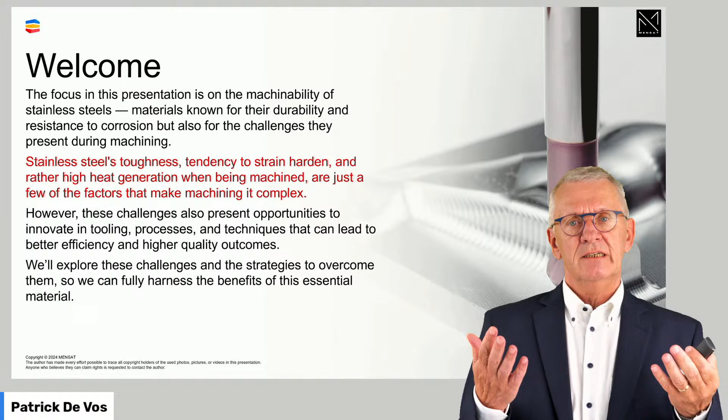And the project I'm talking about was about understanding this material better. And knowing what it means when we do machining, and with other words, knowing what we can expect from a cutting tool in such a material, and how we would select cutting conditions and so on.

And based on research then, in those days, we thought a major thing in stainless steel is the corrosion resistance. Because corrosion resistance leads to the formation of a very thin layer on the surface of a workpiece, a chromium oxide layer. And that gives the stainless steel that typical shiny view and resistance against oxidation and corrosion and stuff. And we thought that is the source of all our problems, because we thought we found something. Now, after all these years, we do realize that corrosion resistance is not really the big thing when we do stainless steel machining. So new insights.

What is new in this domain?

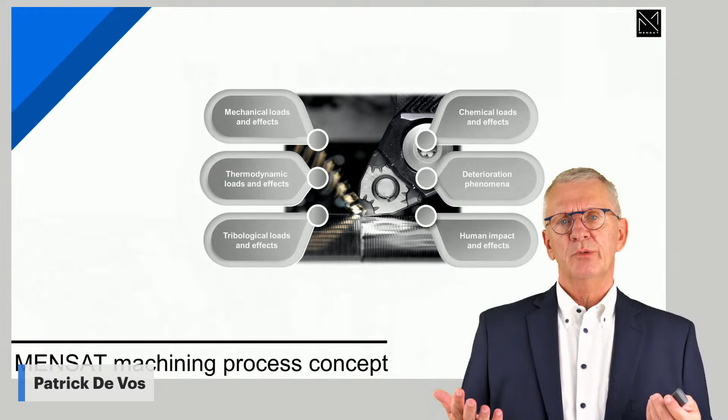And if I look to machining over the years, there is a model I have in my head I developed over time. Machining is a process, when it's steel machining at least, or let me say metal machining, where I deform material, I deform it so much it shears off, and the shorn off material is evacuated under the form of a chip. Now, this process, deformation, shearing off, involves quite a lot of things that are ongoing. You have mechanical effects and thermal effects, tribological effects are taking place, and all of that is influencing how the process is going.

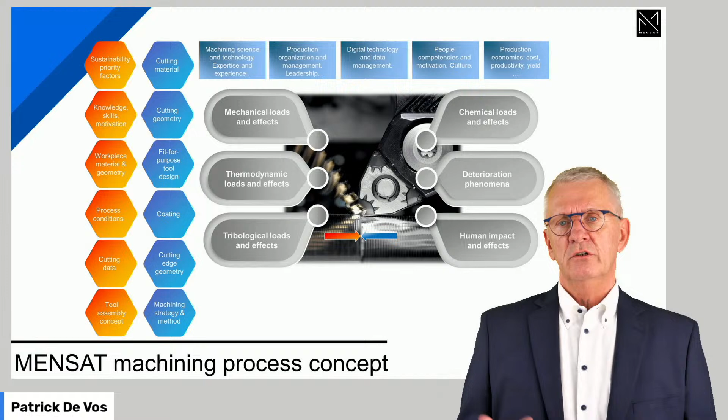Now, solving that equation demands quite a lot of how to say, knowledge, skills a machinist has to possess. He has to understand the physics of the process. He has to be aware of, I would say, economical considerations, costs and productivity and stuff like that. He needs to make sure he's using at all time the best technology available, not only cutting tool technology, but also, for instance, digital possibilities we have today to control this process. We have to embrace them, the attitude of people. So it's quite a lot of things we need to take into consideration.

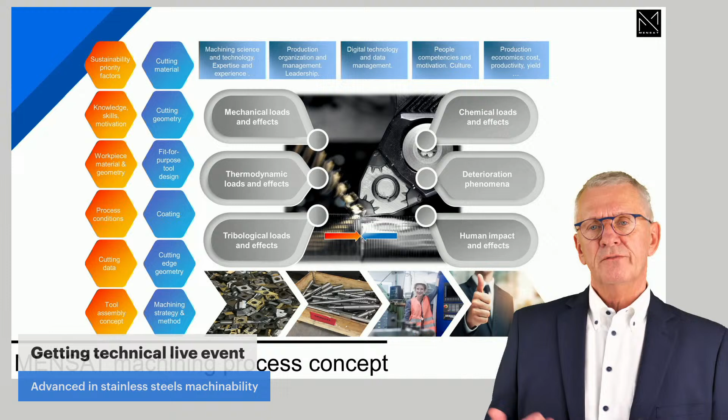And we need, of course, to measure. To measure is to know. We need metrics. And metrics in machining we find in cutting tool evaluation. Used cutting tools tell us so much. We learn from workpiece evaluation. The quality, is it in line with expectations? We learn it from asking the operators.

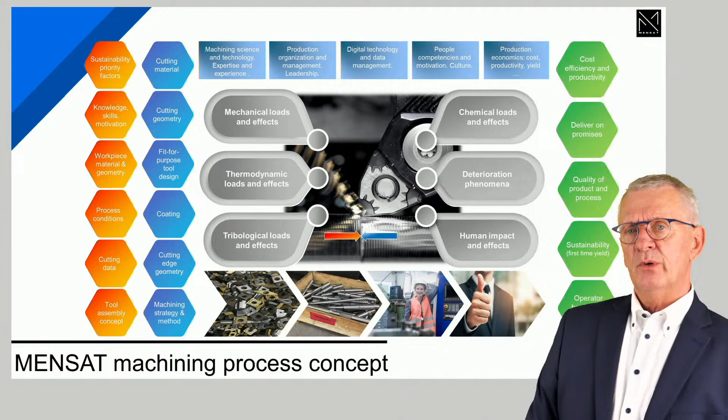Those people are standing all the time very close to the process, and they have their observations based on their experience, what they expect and didn't expect, and stuff like that. And of course, ask customers, ask the people for whom you are producing the parts, if the part you deliver is in line with expectations.

Both price expectations, delivery expectations, quality expectations, all of those things, because that's the result. The result of a machining process is more than just a correctly finished workpiece. It's a correctly finished workpiece in a certain economical situation. If you want to read about these things, there's quite a lot of literature available from Seco on these subjects, which you can ask for at any time.

But very important to realize is that I'm not alone here. I'm together with my two, I can say friends in the meantime, Alasia and Margarita. They are helping to make this happen from a digital technical perspective. I have the fun part, I can do the presentation.

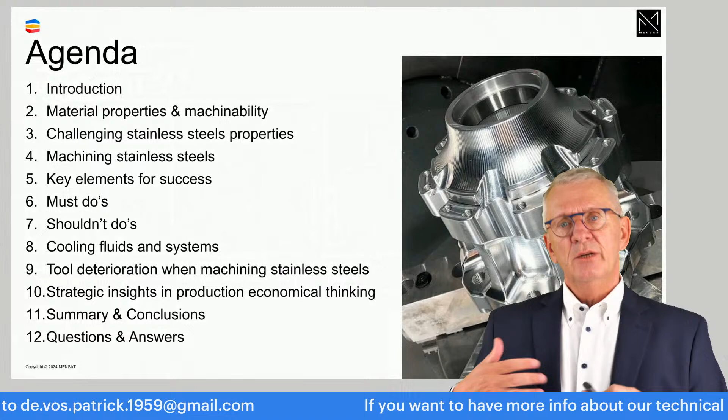What I want to talk about is, in the first part, stainless steel. So what is it, what are the latest developments, what are the challenges, what are the properties when we have to machine these materials. The second part is more a lineup of advice. If you have to machine stainless steels, think on this, do this, don't do that type of stuff. A collection, one could say. The first part is more the academic side, while the second part is more the practical part, the experience from real life I brought together.

Now, stainless steels, first the definition. A stainless steel is a steel alloy. Main alloying element is chromium, and when in a steel chromium alloy there is at least 10.5%, there are different opinions and definitions depending on certain standards and norms here, but at least 10.5% chromium should be present in the structure.

Then we talk about a material with a certain resistance against corrosion, staining, rusting, and that is what we call a stainless steel. Of course, we add all kinds of other alloying elements to this structure to give the material, next to corrosion resistance, other wanted properties more in the mechanical domain, like hardness and that type of stuff. Stainless steel, once being rather unique as a material 30, 40 years ago, today as a construction material is widely used in the industry.

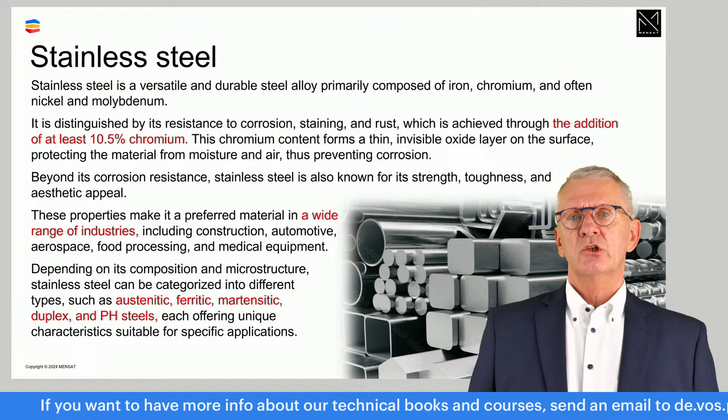You find it in all kinds of applications. And if you look to stainless steel, because stainless steel is a family name, a very big difference between different types of stainless steels is the structure of the material. And that's why we group stainless steels into, I would say, 5 different groups. You have austenitic stainless steels, ferritic stainless steels, martensitic stainless steels, duplex stainless steels, and the so-called PH steels, precipitation hardening steels.

Each of these subfamilies has its own specific properties, and if we have to machine the material, we will see differences. So you have ferritic, martensitic, austenitic, and duplex. I keep PH steels a bit on the side for the moment. All of these material groups are connected to each other because one structure goes into another structure, and we should avoid becoming too metallurgical because otherwise we are going to get lost in time.

It's all depending on which alloying elements you are adding or extracting from a structure, and by doing so you create different types of material properties. Now, most of the time, we use the AISI system here. People talk about the stainless steel from the 400 group or the 200 or the 300 group, that relates to the structure. Very typical, I think the basis of stainless steels, if I look around me today, if I look around in workshops, the most seen structure is austenitic stainless steel.

Austenitic stainless steel, it's the 300 series when you talk about designations. It's stainless steel in which there is chromium as an alloying element and nickel. Nickel is added to chromium stainless steel to strengthen the structure. And that combination, steel, which is iron and carbon, chromium and nickel, that's the chromium nickel steel, the 300 series, austenitic stainless steel.

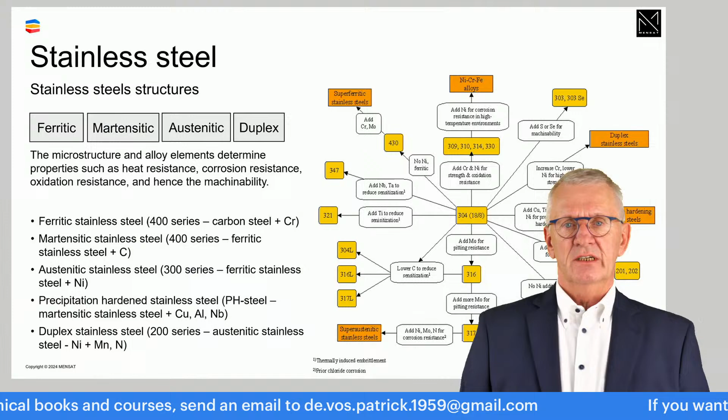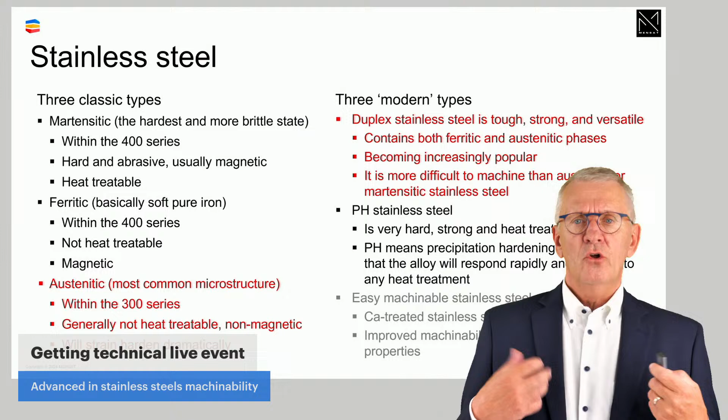So there are three classic types, one could say. You have martensitic, ferritic, and austenitic stainless steels. It refers to the structure. An interesting practical thing to remember, if you are confronted with a stainless steel and you say, I don't know what it really is, a big difference between austenitic and the others is that austenitic is non-magnetic. So you can take a magnet. If the material you have to machine is non-magnetic, most probably you have austenitic stainless steel.

Next to these three basic types, you have the duplex stainless steels. Duplex stainless steels, as the name says, it's a combination of structures. It's a development that a couple of years ago went very fast. All kinds of duplex stainless steels were developed.

For us machining people, duplex stainless steels give a kind of challenge because it's not always obvious what to focus on. Which structure is it, the austenite or the ferrite in the structure, that we have to focus on? That's a bit of a selection challenge we have when we machine duplex stainless steels.

Then you have the PH stainless steels, precipitation hardening stainless steels. It's a Swedish development, from the Swedish metal or iron industry, which came first with this type of material. PH stands for precipitation hardening. It's a material developed to react rather fast to thermal treatments. I'm going to say something not entirely correct, but it's kind of a self-hardening material. If you add heat to it, it starts becoming stronger, harder. Now that sounds very good, but for us machining people that's a big challenge, because what do we do in machining? To a big extent, we add heat to the workpiece material. So we could end up in unwanted situations with this type of material.

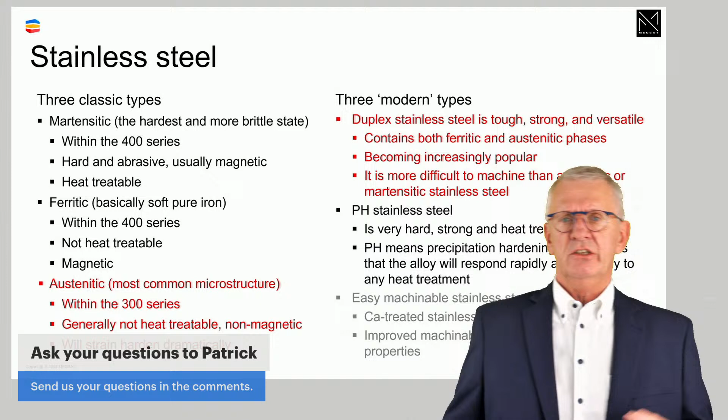With traditional stainless steel, the cutting speeds are rather low. I don't say low, I say rather low, everything is relative. And people feel that as a limitation when they talk about productivity. Taking that limitation away was the aim with the calcium-treated stainless steels, where suddenly you had a lot more opportunities to work with bigger cutting speeds. Of course, that comes at a cost. The cost is, in general, if you compare a stainless steel to a calcium-treated stainless steel, the calcium-treated one, from a material purchasing perspective, is more expensive. On the other hand, it could be a well-done investment if you look afterwards at the productivity you can gain in your machining applications.

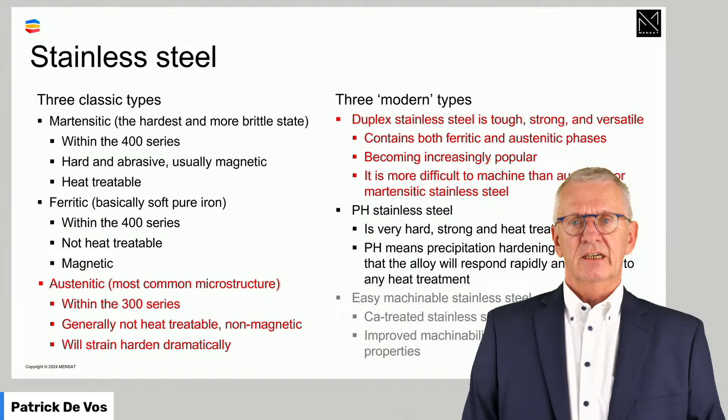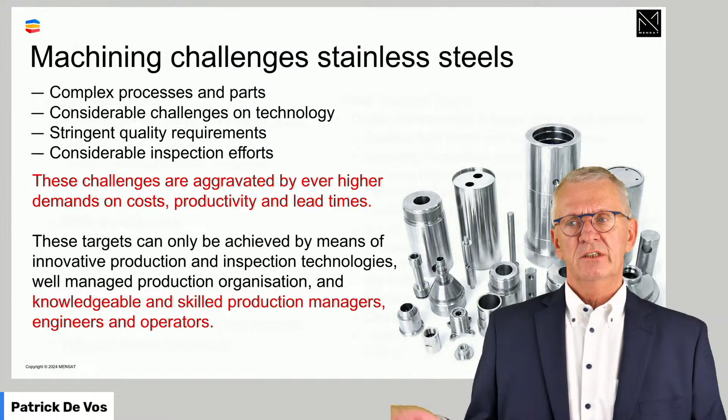Stainless steels are more and more the normal materials. What we see is that very often the applications, the parts, are rather complex. Technology is sometimes a challenge. Quality is always looming around the corner, because these are typical workpieces where quality demands are higher. When quality demands are higher, you have higher efforts for inspecting workpieces, finished workpieces. So that is what the machinist is confronted with in general, in this type of application or workpiece material.

Now, machinability, workpiece material properties, machinability. I guess you are all familiar with the so-called ISO system, where we group materials into 6 different groups. From there, you define where the material you have to machine belongs, and for a certain material group you receive advice concerning tool selection, cutting material, geometry, cutting conditions, and so on. Stainless steels is one of these groups, the so-called M group. That's why a lot of people refer to stainless steels as the ISO M materials. It's one of those sayings in the machining world.

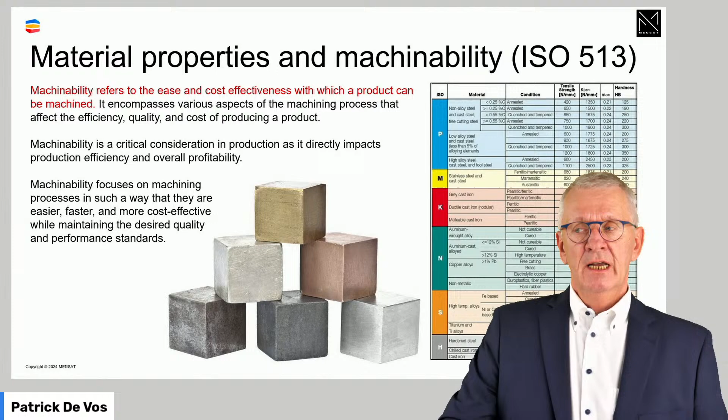If you look at the traditional ISO system, it mainly focuses on mechanical properties to classify materials. For a long time, when we looked at stainless steels, we saw the mechanical properties, we saw the results from machining, we saw wear patterns, we saw tool life, and it was a bit of, we did not really understand, because tool life was lower than expected.

Tool wear was more severe than what we expected based purely on mechanical properties. That's why 10, 15 years ago there was a big project, again in Sweden, where the steel industry and tooling people worked together to try to figure out if it's enough to base machinability ratings on mechanical properties only. The result of that big project, led by Professor Ståhl from Lund University, was that next to the typical mechanical stuff like hardness, abrasiveness and ductility, there are other things that influence how a material property will affect a machining process.

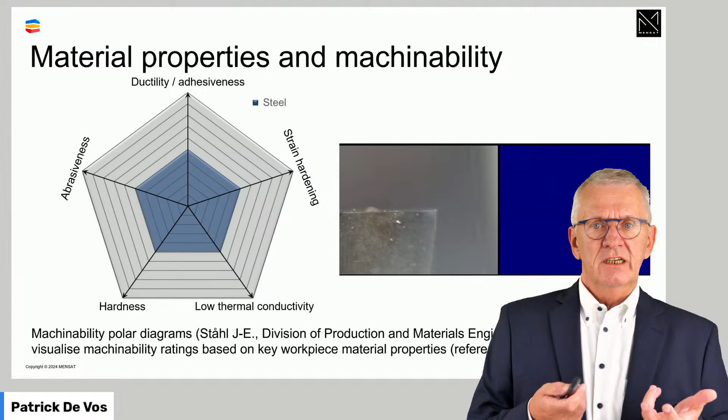The two main ones are strain hardening effects, some materials become harder when you deform them, and machining is a deformation process, and thermal conductivity, during machining heat is generated, and it matters to what extent it's possible to evacuate that heat away out of the cutting zone, yes or no. That means, and that's what I try to illustrate with the videos you just saw, that a machining process has a mechanical side to it.

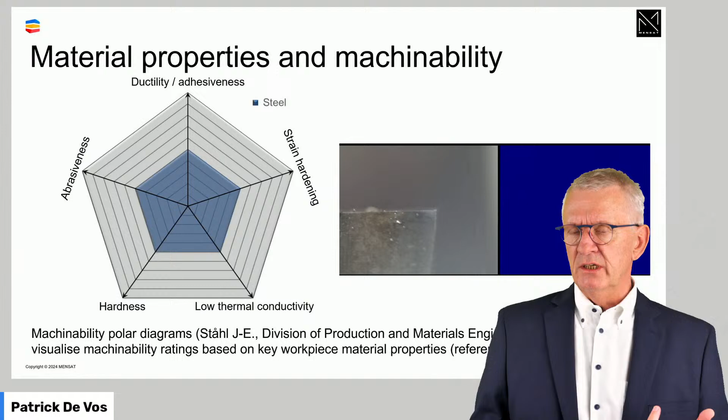In this diagram you see the 5 axes, which is a visualization from the model developed. The left side is the mechanical side: ductility, abrasiveness, hardness, typical mechanical properties. The right side is more the thermodynamic side: strain hardening effects, low thermal conductivity, ductility, adhesiveness. The vertical axis is a bit on both sides.

So if we want to understand how a material behaves during machining, there are 5 properties we need to take into consideration. The interesting thing on this model is that the old saying that flank and crater wear is the only acceptable wear during a machining process is very correct if you machine steel, but it does not really work if you have to machine another material. We can improve that by saying to which extent one of these 5 properties is present in the material, you will see a certain typical wear pattern on a cutting edge.

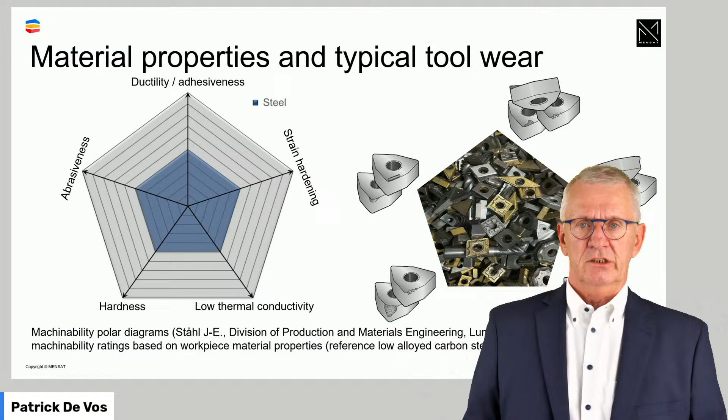That means that if you are confronted with a material and want to figure out how you should do machining, which tool, which carbide grade or cutting material in general, which geometry, feeds and speeds, you make certain selections and observe the process and look at used cutting edges. You can much more precisely say, okay, what I see is what I expected or not. And if not, I have to redo the exercise. I think that's perhaps the most beautiful thing on this system. It makes wear control, deterioration control, much more easy or predictable.

Now, if I look to stainless steels, they have a certain structure, they have alloying elements, there are mechanical properties, and so on and so forth. It's the ISO M group.

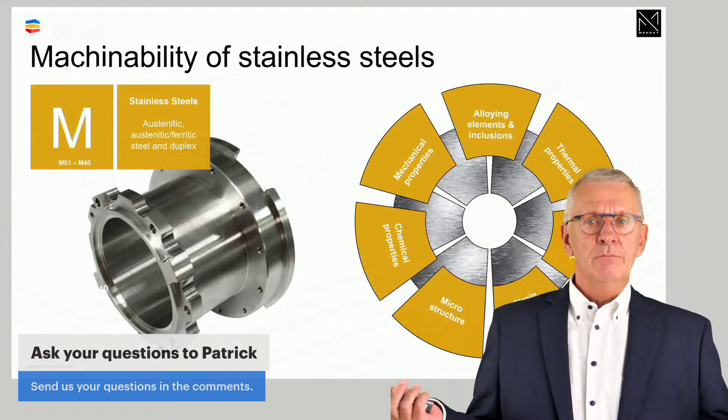That means we have to be careful with the heat which is generated, because if more heat is generated, it's not that easy to evacuate it away from the cutting zone as it is in traditional steel, meaning that the cutting temperature will go up higher than what we are used to. And that has consequences for tool selection and for cutting condition selection.

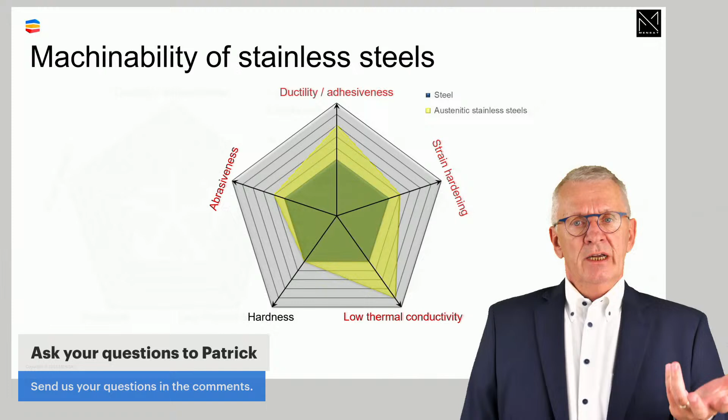If we look at austenitic stainless steel, and I put this one in the middle because it's the one we find mostly in the industry, in the workshops today, here we see, with the exception of hardness, that compared to traditional steel, everything is more present. It shows higher abrasiveness, higher ductility, higher adhesiveness, higher strain hardening, and seriously lower thermal conductivity compared to steel.

So machining austenitic stainless steel demands for, and that was the challenge back with the project we had a long time ago, tools specifically designed for a different type of environment. It demands for cutting conditions which are selected in line with what the cutting edges will be submitted to.

To make the picture complete, PH stainless steels, precipitation hardening stainless steels, you have to worry mainly there about abrasiveness. Ductility will be a lower of a thing. Chip control will be easier than normal, but abrasiveness is the thing to worry about in PH stainless steels.

Duplex stainless steels, as I said, if you compare them with steel roughly, everything is more severe there. But the thing with duplex stainless steels is that we don't know exactly, workpiece by workpiece, which property will be the prevailing one during the actual operation. For sure, low thermal conductivity is also a major thing there.

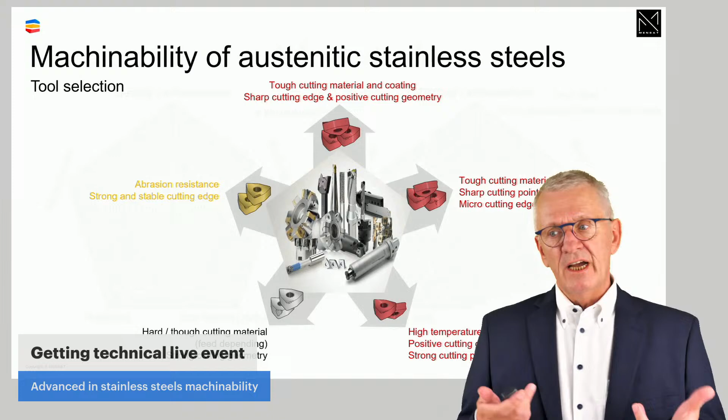So, I use the example here of austenitic stainless steel. If you are confronted with an austenitic stainless steel, how do you select tools? Focus on the red parts here. Those are the demands we have for cutting tools if you want to take into consideration the typical properties of stainless steel. The red ones are the important, critical ones. The orange means be aware of, and black means there is no difference with steel machining. The same applies with cutting conditions.

Focus on the red parts, because compared to traditional classic experience in steel machining, we will see differences there. Keep your eyes on used tools. Used tools will tell you how well you made your selections.

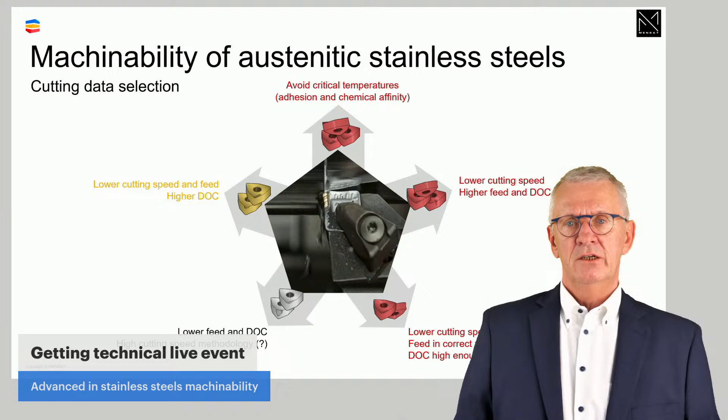Something I'd like to add here: we always talk about what would be a good tool, a good machine, a good geometry. But what would be a good operator? What is a good machinist? A good machinist is somebody with knowledge, insight, and who knows what's going on.

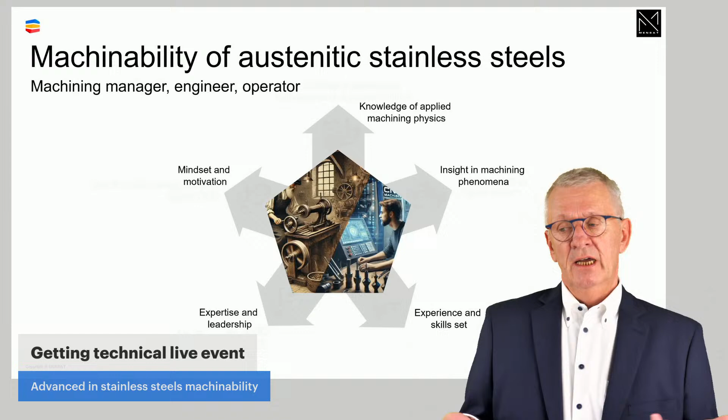If you stand next to a machine where you see stainless steel being machined, you see things. And based on what you see, it tells you a story.

Machining of stainless steels, tool wear will be faster than what you are used to. That means machining costs will be higher than in traditional steel machining. Tool changes will be more frequent due to shorter tool lives, and that means your machines will stand still more, relatively speaking, than in steel machining, lowering your productivity.

On the other hand, if you look to workpiece quality, you are going to be confronted with some things that will demand post-machining processes like deburring, and that will also lower your productivity.

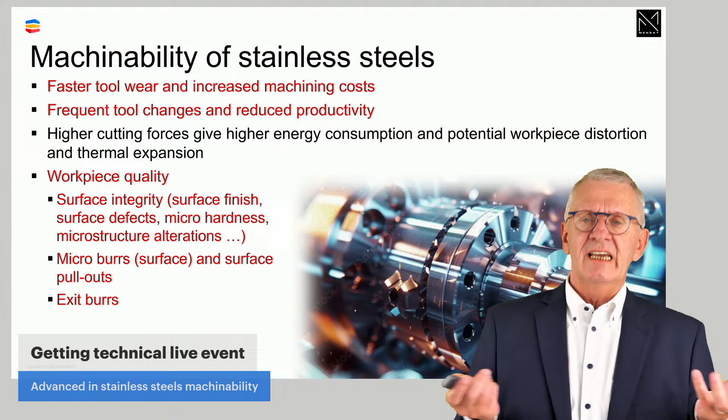I draw your attention to this, and later on I want to line up some things. Production economy, having an eye for costs and times, when you do stainless steel machining, should be on a higher level. It's dangerous to make statements like that, but I hope you understand what I mean - it's a more important thing than in traditional steel machining. Not saying that in steel machining it's not important - don't put words in my mouth that I didn't say.

Stainless steel machining - insights and practical experience, bringing it together, that's what we want to do.

We are confronted with a material with higher toughness. Higher toughness means higher cutting forces, and it means increased, faster tool wear. Those are the things we have to worry about.

Strain hardening tendency is always present to some extent in austenitic stainless steels, for instance, very much. It leads to very specific tool wear patterns, and it leads to surface roughness considerations that are important. Tool life could be limited due to that.

Lower thermal conductivity is perhaps the most important thing. It means heat generated during the process is not evacuated, stays in the cutting zone, and we will have to balance that by tool selection, cutting condition selection, and machining strategy selection.

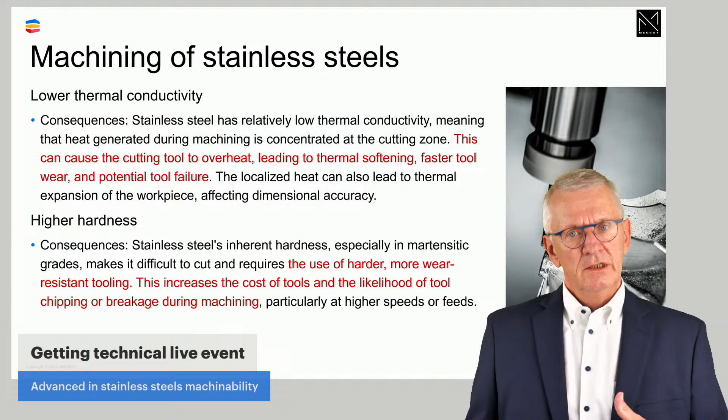Higher hardnesses for some - think of martensitic stainless steel - for austenitic stainless steel it's less a thing. What I'm trying to give you here is an overview of properties you should be aware of, so you can make sure your selection process is in line with this.

Adhesion tendency, the formation of built-up edges - austenitic stainless steel has a higher adhesion tendency and a tendency to gall. I'd like to make a difference between the two, because adhesion is a part of the workpiece material connecting to the cutting tool. It's a rather soft connection, easily broken off, and it could lead to chipping of the cutting edge - that's the traditional built-up edge stuff.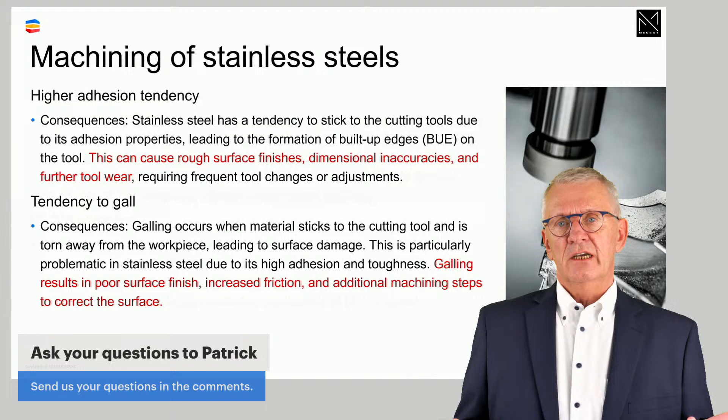Tendency to gall means that in some cases the material that connects to the cutting edge connects so much that it breaks away a part of the machined surface on the workpiece. It seems the same phenomenon, but gives other types of issues, because it deteriorates the quality of the machined surface of the finished workpiece, and we have to be aware of that.

Corrosion resistance - just for sentimental reasons I bring that anti-corrosion layer up again. People say, if you know the PRE factor, which we use for defining the quality of a stainless steel, the higher the PRE, the higher the corrosion resistance, one could say. But if you have high PRE, it means you have a strongly formed anti-corrosion chromium oxide layer, and if we have to machine through that, it has consequences.

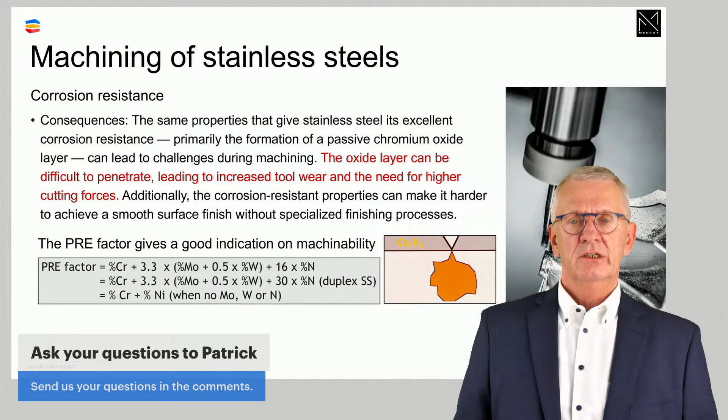40 years ago, we thought that was it. Today, we know better. We know that this plays a role, but much more important is the formation of a strain-hardened layer on the machined surface that influences how the process goes.

Adhesive wear and galling wear, the picture is different. That will happen at certain critical temperatures, and if your temperature is lower or higher, then it will disappear again. That means that in stainless steels, we talk about a low productivity domain and a high productivity domain. Low means that you keep your temperature lower than a certain critical value to make sure adhesive wear does not take too much out of the cutting. High productivity means you are able to take your cutting speed high enough to pass the dangerous zone, and again have temperatures which are not favorable for build-up edges to be formed.

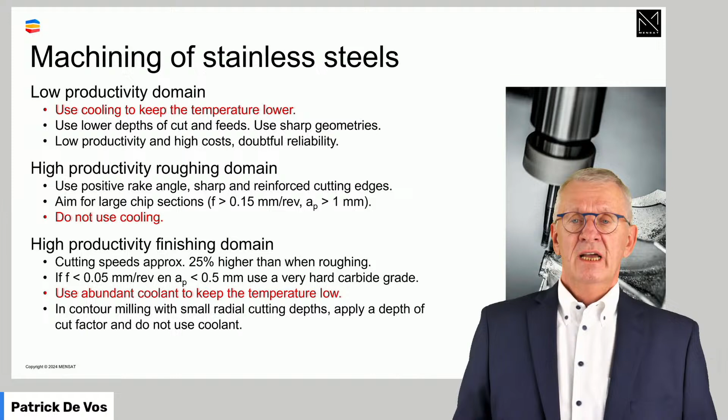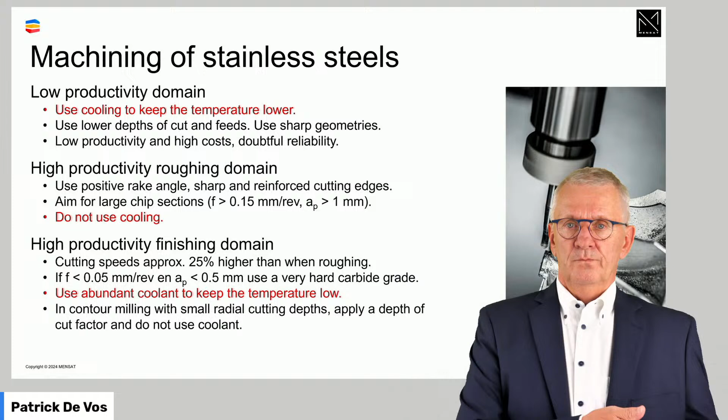It's a selection you make, depending on the equipment you have, depending on the workpiece you have. Can you go for higher cutting speeds, meaning productivity? Yes, good, do it. Can't you? Go low. It's something to bear in mind.

General guidelines: if you machine stainless steels, stable tooling, sharp geometries, large depths of cut and feed. It's all based on experience. Change cutting edges regularly - remember you will use more cutting edges, tool life will be shorter. Think on it that stainless steels have hard surface layers, chromium oxide, strain-hardened layers. Think on heat development - it's limited, because you could end up in critical temperature situations.

Chip thickness is very important - the thickness of the chip, because the thicker the chip, the more it has the capacity to evacuate heat out of the cutting zone. Thin chips don't have that. That would make the problem with too high temperatures in the cutting zone even worse.

Use big tools, have a big mass to evacuate heat. If you reduce your cutting depths, then you should increase your cutting speeds. Remember, it's not about low temperatures, it's not about high temperatures, it's about avoiding some critical temperatures.

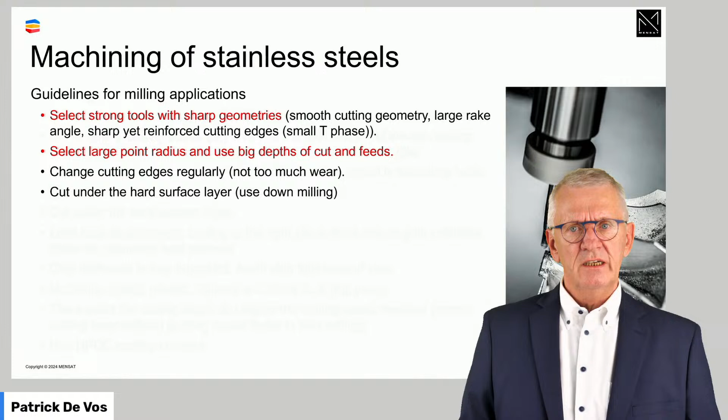Specifically in milling, like in general turning, drilling, whatever - strong tools, sharp geometries, large point radiuses, especially for end mills, I'm thinking. Big depths of cut and feeds, change the milling cutters or cutting edges in due time, cut under the hard layers, do down milling if possible, limit the heat development, use cooling, use it correctly.

Average chip thickness - chip thickness is in general important. The so-called average chip thickness in milling is even more important. Avoid feeds of 0, because then you have strain hardening extremely taking place.

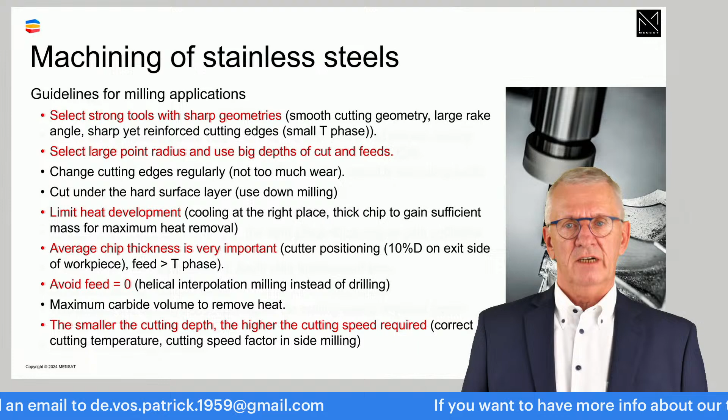Maximum volumes, carbide volumes to evacuate the heat. And also here, small depths of cut means high cutting speeds. The so-called speed factor in milling applications is a very important thing when you machine stainless steels.

Conclusion: you will need more cutting edges than at first sight, perhaps what you thought when you compare to steel machining. Be careful with things making life even more difficult - interrupted cuts, casting scales, casted stainless steels - and be careful with false economy, because after a roughing operation, there comes a finishing operation.

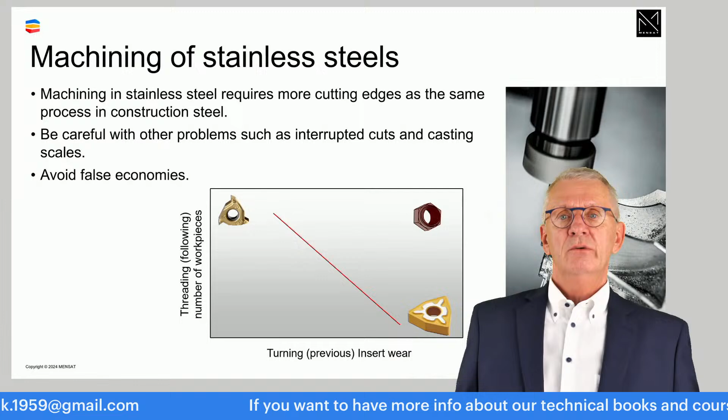What you see here, I try to visualize a turning application followed by a threading application. If you use your cutting edges too long in the turning application to save money, you could create strain hardening layers on the surface where later on a threading tool, which we use with small feeds and depths of cut, it's impossible to cut through. And then you are going to save on turning inserts, and you are going to spend a hell of a lot of money on threading inserts, which are more expensive. I mean, keep your economy right.

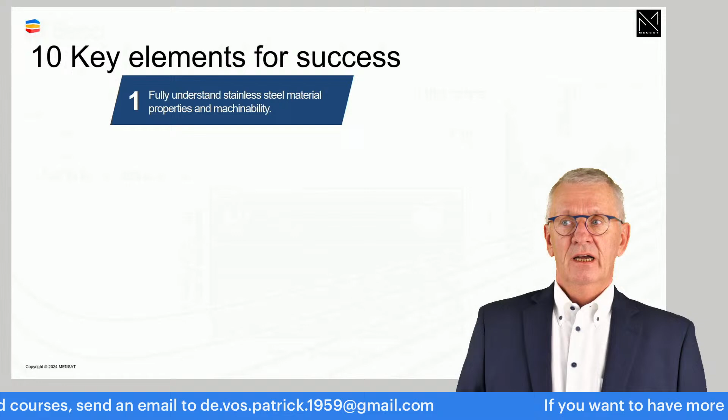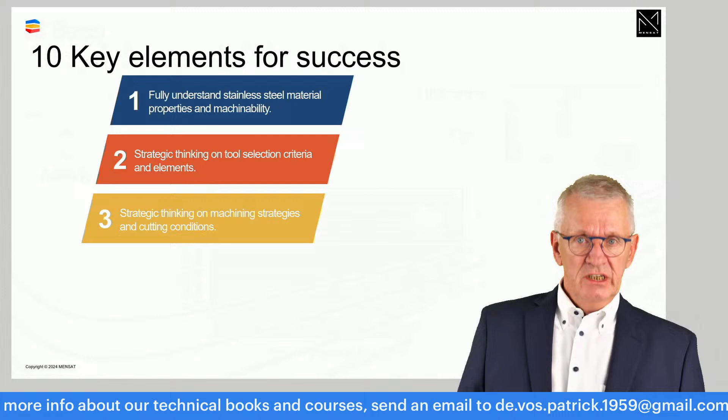Make sure you do the correct steps here. Fully understand stainless steel - tip 1, and how it relates to machinability. Strategic thinking on tool selection. Machining strategies and cutting conditions. And more important is geometry than cutting material.

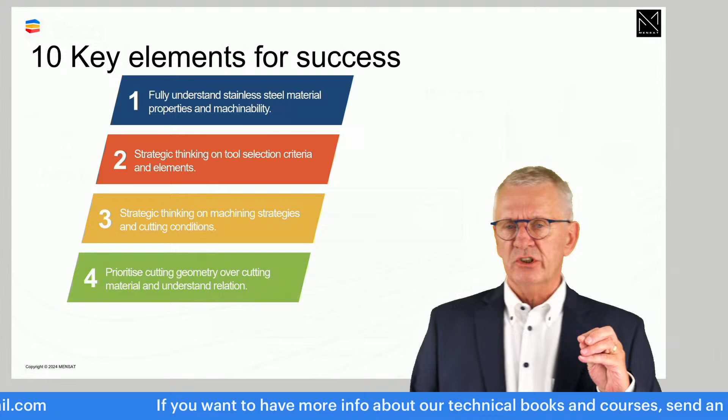Again, I don't say cutting material is not important. Cooling is an important thing here. Wear monitoring - your tools will wear out faster, so especially when it's new, make sure you follow up. Clamping. Stainless steel is a typical material where we will have micro vibrations. Clamping and fixturing of workpieces and tools is important.

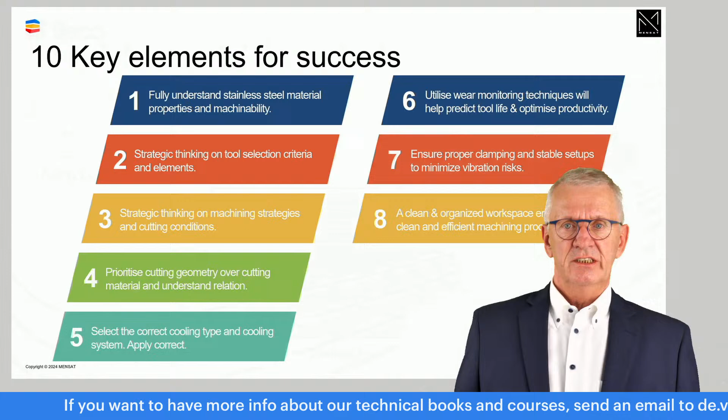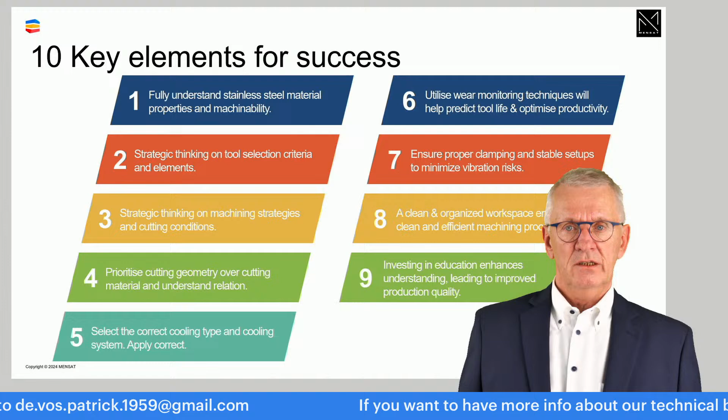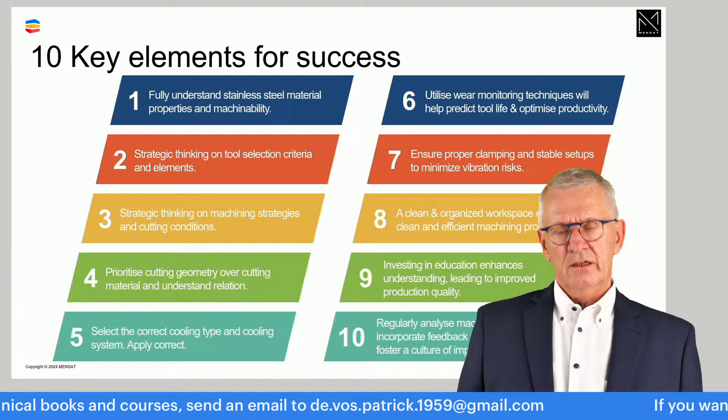Make sure the work environment is as neat as possible. That's a bit beyond the actual cutting. Make sure people have the needed education and knowledge to understand the material they are machining, so they can react in the appropriate way when they are facing something, and make sure to analyze regularly machining, and what you learn from the analysis, document it, keep track of it. It's very valuable information for you.

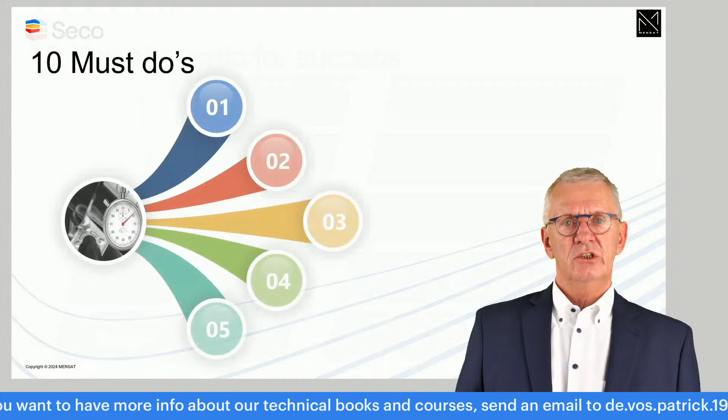Things you should always do if you machine stainless steels: the correct tool. As I said, the big problem in the past was we didn't have correct tools for stainless steel, which led to a lot of problems. Today we have the correct tools, make sure you use them. Sharp cutting edges is a major thing.

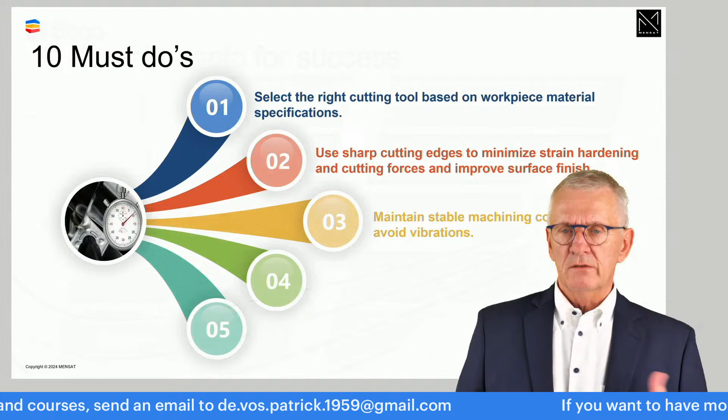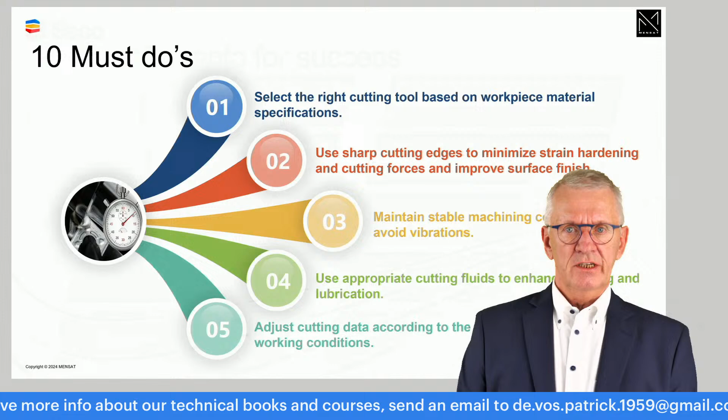Stable machining, you will be confronted with micro vibrations, so be aware of that. Cutting fluids, cooling systems are important here. And cutting data must be in line with the material you have to machine.

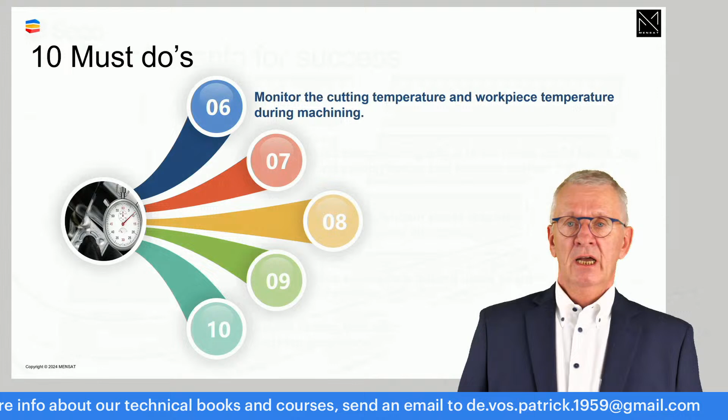It all seems normal, but trust me, I see so often when I'm in a workshop that these basic things are not always respected. Cutting temperatures is the thing you have to worry about. Make sure your equipment, being the machine tools but also your cutting tools, are in the best possible condition. Chip removal is important, because you will have more difficulty evacuating chips, so it deserves some more attention.

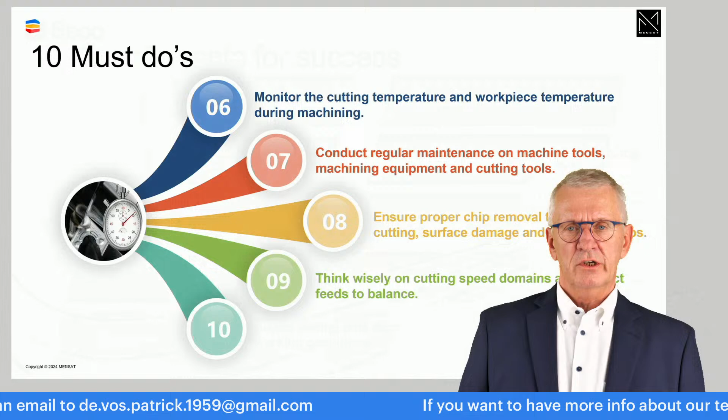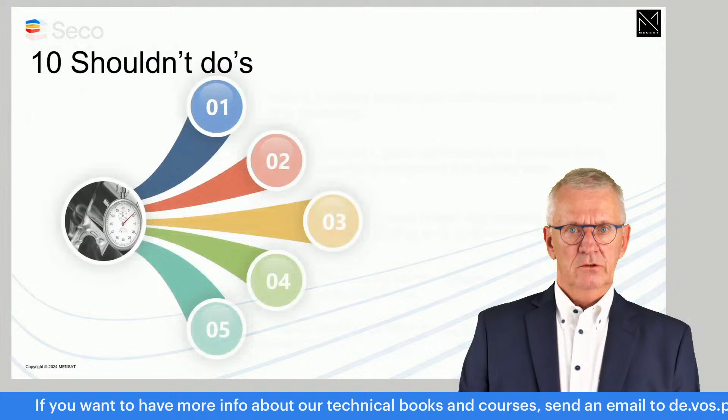Cutting speed domains, remember it's not as high as possible or as low as possible. There is somewhere a domain you have to be careful with, depending on temperatures. And again, keep track of your observations and make sure it's available for everybody who needs it.

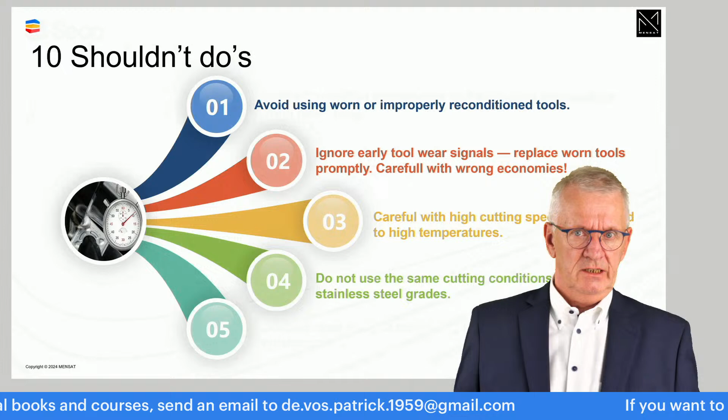Too much worn tools should be avoided. Keep your eyes on the tool and make sure you can read the signals correctly. High cutting speeds, okay, but think about how cutting speed leads to more heat generation, and heat generation potentially will increase your temperatures, and that could be an issue.

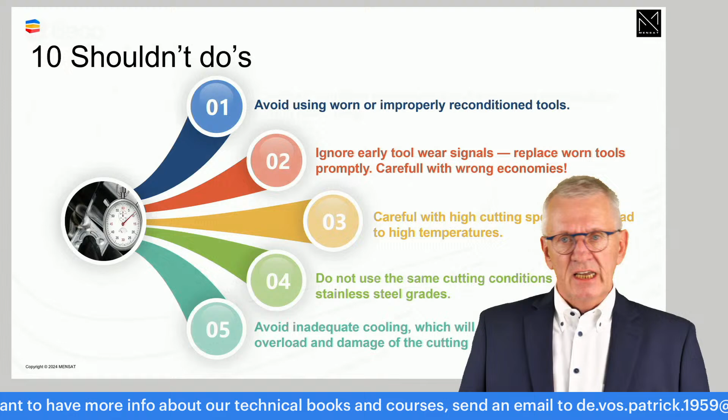Cutting conditions should be different depending on the type of stainless steel. There is not one cutting condition for stainless steel, all of them. It's a lot of different types of materials. Cooling, I already mentioned how important it is.

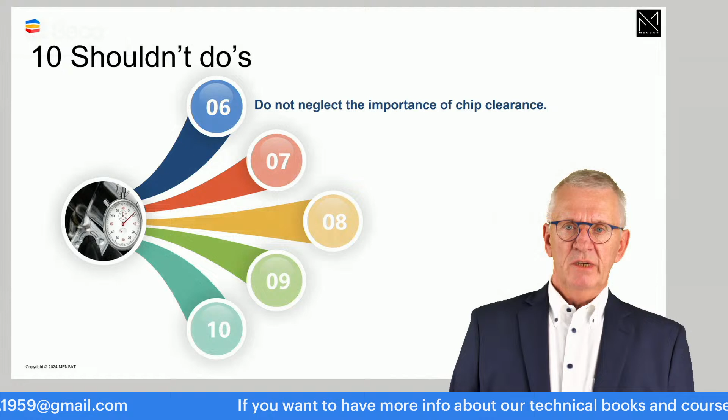Chip clearance, make sure the chips go away from the cutting zone, especially in milling applications, I would say it's an important thing. Cooling should be adapted to the application.

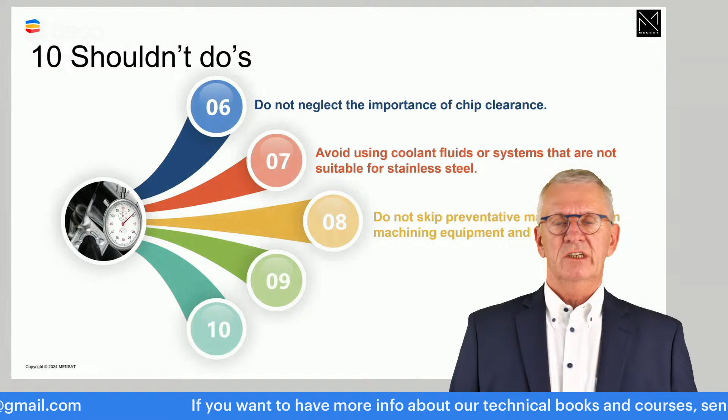Preventative maintenance should be at all times. It's a bit in line with what you should do. So what you should not do is here.

Rigidity, lack of rigidity is a dangerous thing. And again, untrained, uninformed operators and engineers is not a good thing.

A few words on cooling. Cooling systems I want to focus on. Flood cooling can work in stainless steels in most applications.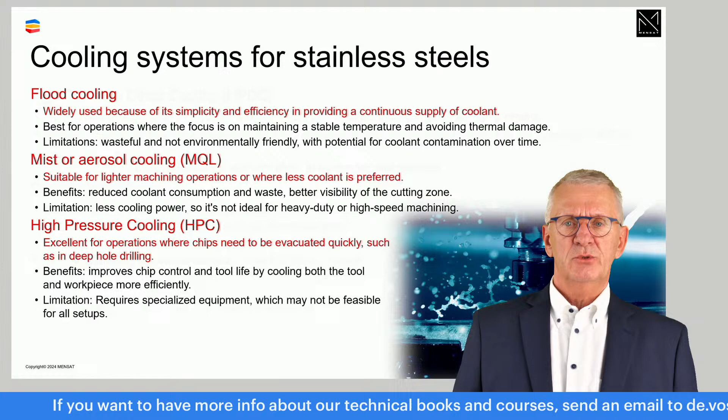Mist or aerosol cooling, the so-called MQL cooling, be careful. In certain circumstances it can work. High pressure cooling can work, especially where chip evacuation is a major issue.

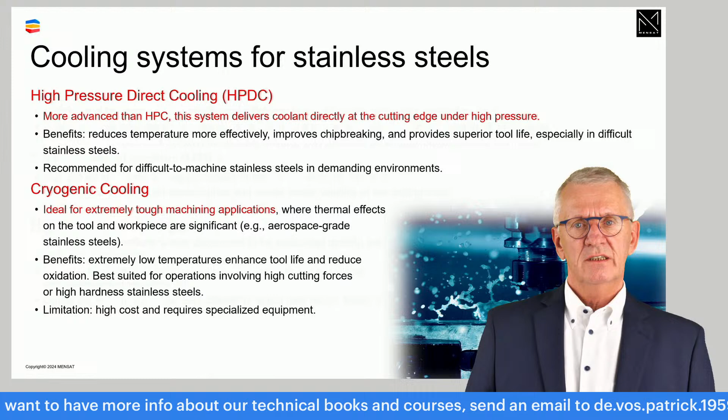But coming to the two interesting ones, perhaps for stainless steel, or more interesting than the traditional ones, is the so-called HPDC type of cooling, high pressure direct cooling. If you compare that with other cooling systems, this really gives very noticeable improved situations. And cryogenic cooling, perhaps that's a little bit too much still in an academic environment, but it gives promising results.

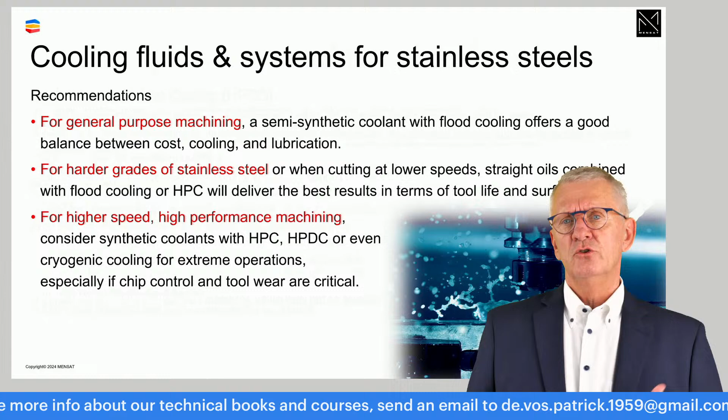General purpose machining of stainless steel, flood cooling, rich emulsion flood cooling is most of the time okay. More difficult materials go for high pressure cooling. High pressure, HPDC or cryogenic, if you chase really high productivity, are the types of cooling you should be aware of.

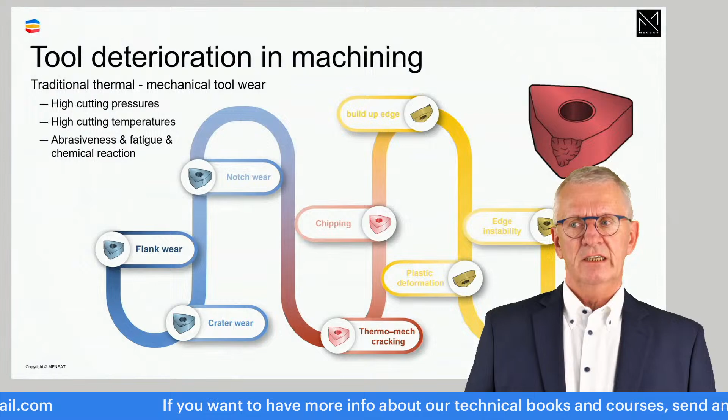Tool deterioration, one of the metrics we have to evaluate if things go well. You have the traditional things we say about tool wear. If we talk about it, I use the example here of austenitic stainless steel.

For each of the different families, you can draw up a picture like this, but austenitic being the most common stainless steel still today. Depending on which properties exactly you are confronted with, and again here, red means that is going to be major there. One can evaluate used inserts in line with what is the primary wear, because that's what I try to show with the two photos here.

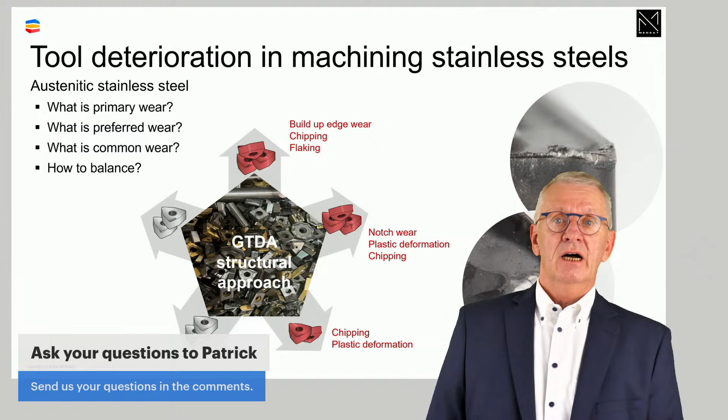If you machine stainless steel, most of the time you will see combined wear patterns on a cutting edge. And then the question is, which one is the primary one, the most important one? The one leading to a certain tool life. What is preferred? What is expected in line with this concept? What is common? And if preferred and common, I mean what you see mostly, is not in line, how to bring it in line. That is what you are confronted with.

Duplex stainless steel, just wanted to give you the view. With duplex stainless steel, depending on the actual material, you will be confronted with all kinds of different combinations of these 5 properties.

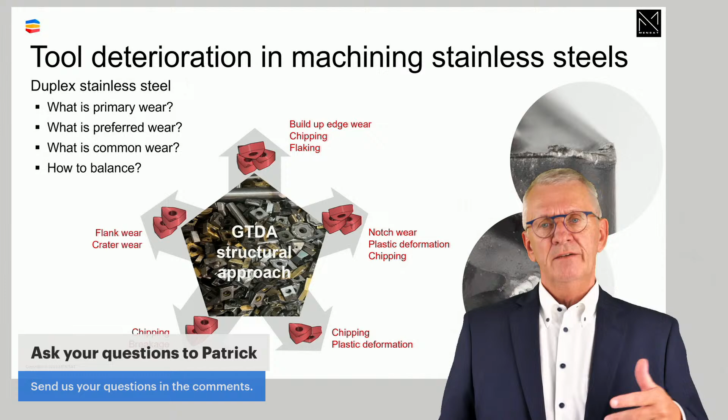And that means that wear analysis is a difficult thing here. It demands well-educated, well-trained people to be able to handle this. What is the primary wear, and decisions will need to be taken. What is preferred and what is common? If not in line, how to balance.

Now, it's a more difficult material. No, I should say it's more expensive to machine stainless steel than it is to machine traditional steel. That means that production economics is on a higher level important.

Production economics should even be somewhere in the head of the operators in case of stainless steels. Some basic things: cost benefit comparisons. I can buy a specific tool for stainless steel, but it's more expensive. So what are the benefits? Make sure you, at all times, if you compare, also see both sides technically.

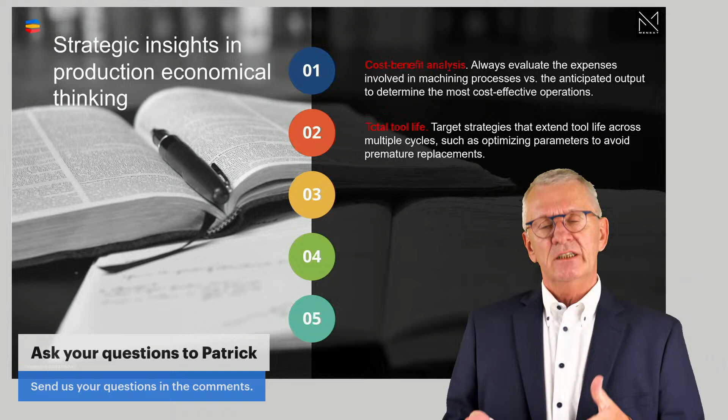Total tool life, especially in small batch production, this is a hard one. I dare to say, based on my own experience, that in small batch production, especially high stainless steel machining, 30% of the cutting edges end up in the recycle bin while they still have capacity to cut. So it's a major thing here to try to see the full picture.

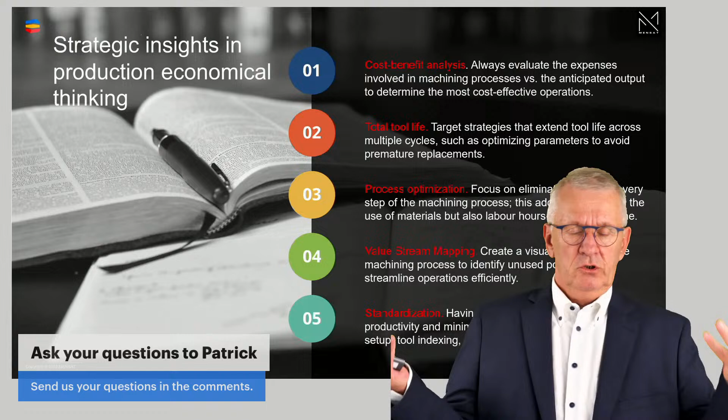Process optimization: what are the best cutting conditions, what are the best cutting tools. Value stream mapping can be applied. Some of you perhaps do that on a machining process, to see where the waste is in the process and how we can avoid it. Standardization is very important too. Often I see one workplace with 10 operators, and every operator has his own tool for certain applications, each with their own argumentation. I don't say it's wrong, but is that what we want? 10 different tools for the same application in one workshop.

Advanced technology: people say, but HPDC cooling, that requires special tool holders, and they are expensive. But again, I go back to my first point, cost benefit. Advanced technology is going to give you a lot, but part of advanced technology is that when you have to purchase it, it's a bit more expensive.

Material selection: if you have influence, a machinist can always put on the table, why not use easy machinable stainless steels for certain workpieces? It would gain a lot of money and reduce the costs in machining, of course. Purchasing people will say, but it's more expensive to buy.

Education and training, I always come back to that. Make sure with your suppliers you have, I would say, a key partner agreement type of thing, so that you can count on certain things.

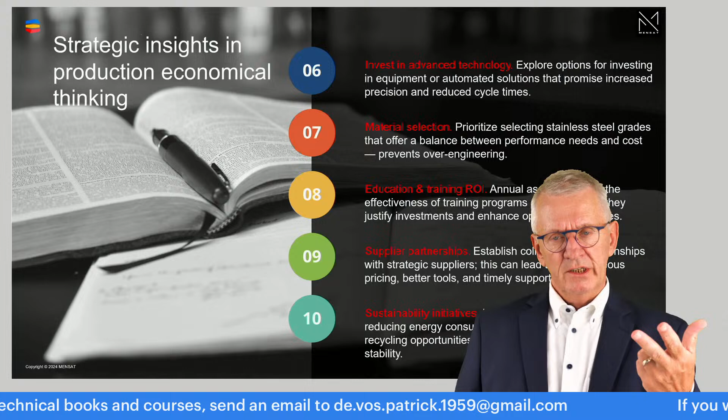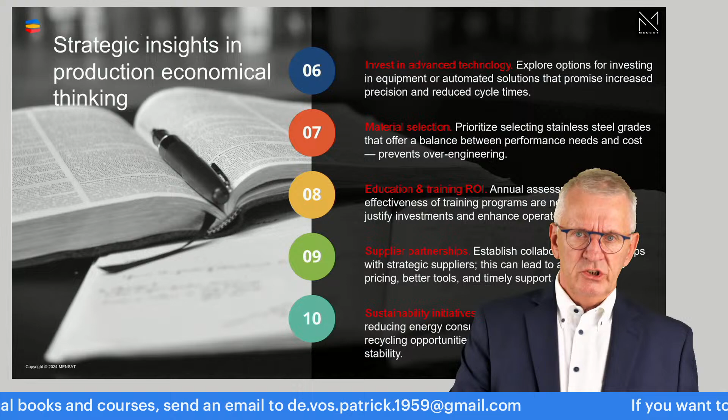In the present world, sustainability is something, especially for stainless steels, because we are going to consume more tools, more time, more money, and the demands on people are higher—all subcategories under that big word, sustainability. Sustainability in stainless steel machining applications is a bigger challenge than in traditional material applications.

Stainless steels is a family name; there are different groups, mainly based on the structure. Faster tool wear, more issues with surface quality, higher machining costs, lower productivity is a reality if I take traditional construction steel as a reference. That means that from a technical and technological perspective, selection of cutting tools, selection of cutting or machining strategies, and cutting conditions deserve more attention.

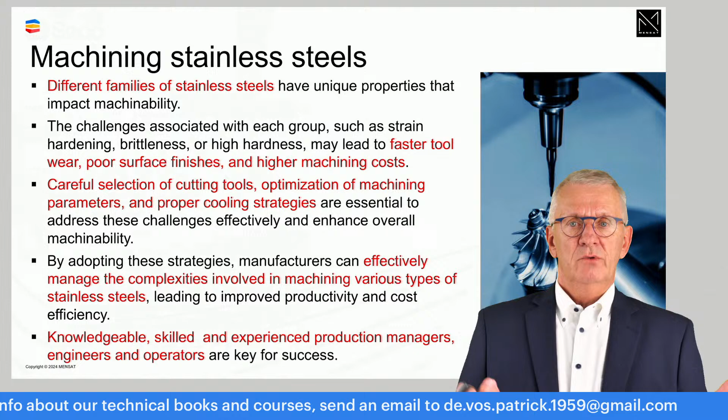By doing that, what we want to influence is the effectiveness and the efficiency of the process, because we have to keep under our attention economies, and knowledgeable and skilled people, obviously.

Practical geometries is an important thing. You can have situations where you face frequent breakage of cutting edges, not due to the cutting, but due to chip evacuation, so that also deserves your attention. Notch wear, build-up edge wear, and plastic deformation are most of the time present on cutting edges. Don't spend too much time trying to make it disappear, because it's impossible—it belongs to the game. Accept it. High feeds, high depths of cut are the terms you have to think on.

Cutting speeds are the third factor. There you balance to make sure your cutting temperatures are in the correct zones. Rich emulsion flood cooling is okay as a cooling system. HPDC is better—I haven't seen any situation where HPDC didn't outperform by far typical emulsion flood cooling.

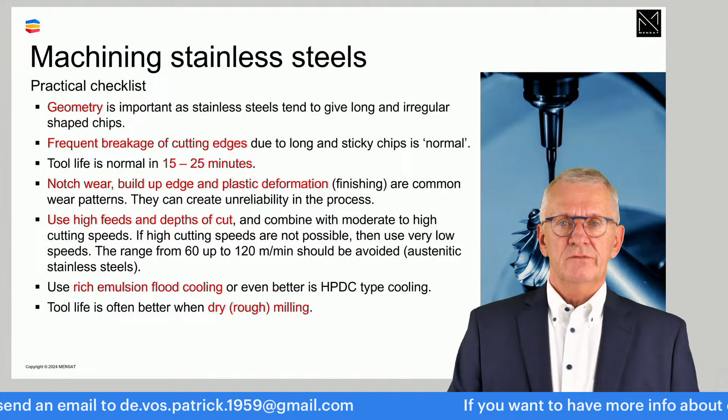There are situations, I'm thinking of rough milling applications, where dry machining is even better. That depends on whether you can't reach the needed temperatures in the high performance domain; by selecting your cutting conditions, you have to try to find other ways to artificially increase your temperature in the cutting zone, and one of those things you could do is leave the cooling away.

Final thought, each time I talk about machining: it's about people. Make sure that's my final thinking here—make sure your people are trained, educated, and have all the needed information if they have to machine stainless steels.